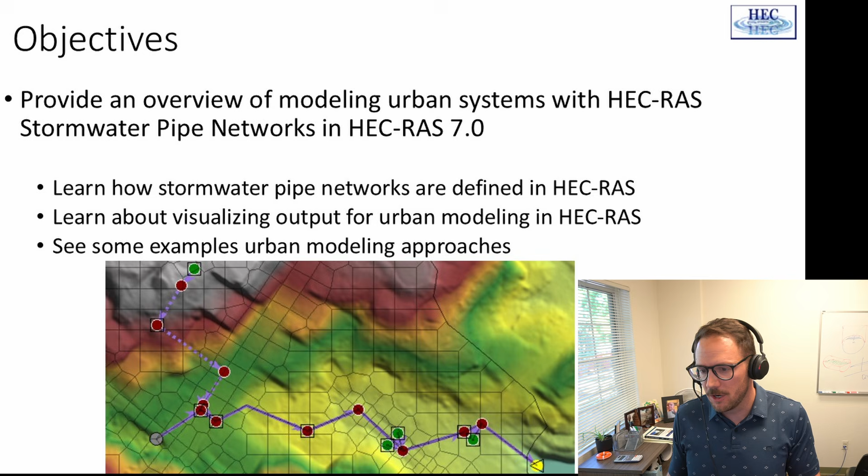Our objectives for today: I'm going to provide an overview of modeling urban systems with HEC-RAS using our new stormwater pipe networks in version 7.0. We'll learn how stormwater networks are defined in RAS, how to visualize output for urban modeling, and I'll walk you through some examples of common things you'll come across while doing urban modeling and stormwater, and some ways to handle those.

I'm going to walk you through the methodology. Then we'll talk about geometry data, so how nodes and conduits are attributed and how to build a pipe network. We'll briefly talk about boundary conditions, and I'll show you how to access results. Finally, we'll close with some fun examples of common applications for using stormwater pipes in RAS.

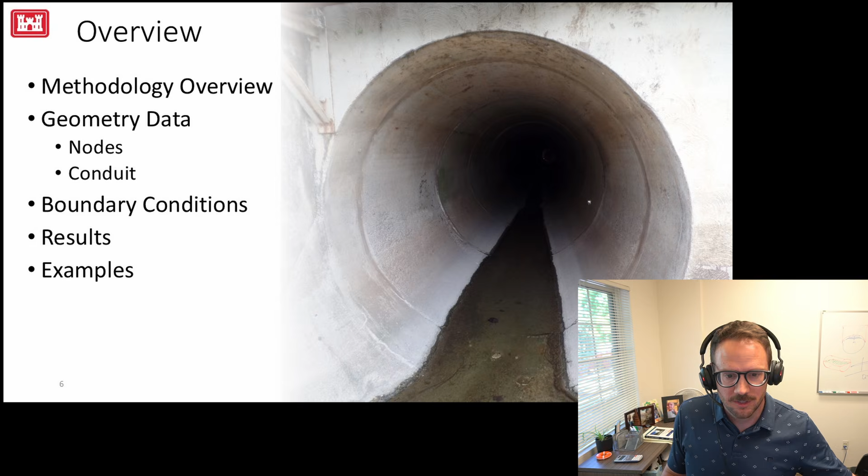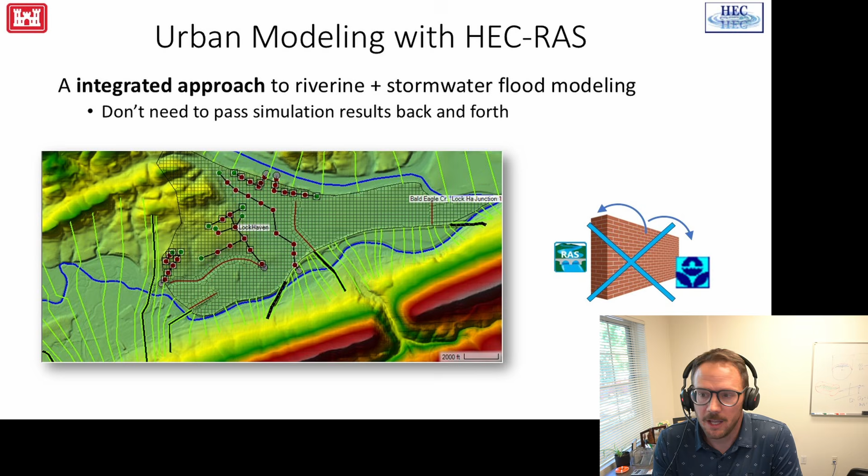So first things first, the big headline here is that now with stormwater pipe networks in RAS, we really offer an integrated approach to riverine and stormwater flood modeling. In the past, maybe some of you have done this: you wanted to use RAS for our robust 1D and 2D surface models, but you also needed to model stormwater pipe networks, and we didn't have that ability. So one method people used was to compute their stormwater networks in some other software, usually an EPA SWMM-based software, and then pass boundary conditions back and forth.

And this is awkward, and it doesn't often work great. So now you don't have to do that anymore. With HEC-RAS, it's an integrative approach to 1D, 2D surface models and stormwater pipe networks.

In addition, you guys are pretty creative. I've seen some really creative workarounds to model pipe networks in RAS and 2D surface models, such as culverts and ditches and burning channels in. So you don't have to do that anymore either. You can actually model those pipe networks directly.

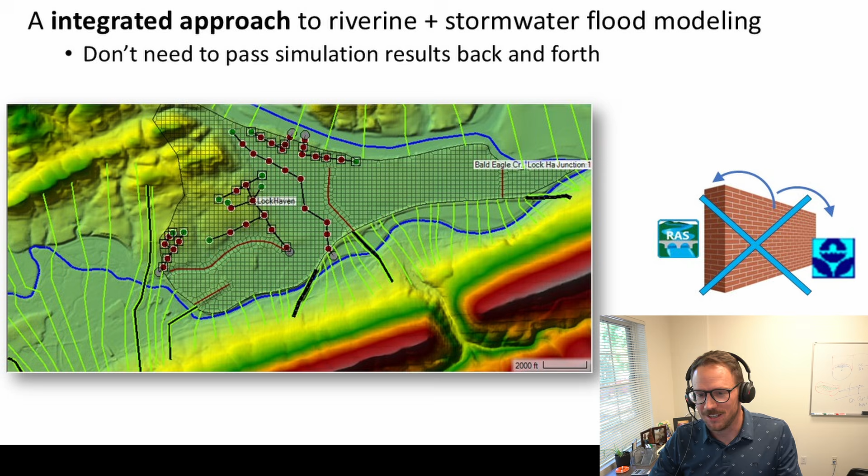So what are they? Pipe networks in RAS allow you to create nodes and conduits, create a network, and then integrate that with your existing surface model, whether that's 1D or 2D. We're really excited about this because it really expands the applicability of RAS for urban and interior drainage modeling.

This type of modeling is becoming more and more popular, and it's becoming more and more required for studies. The timing for pipe networks is great - you can build these pipe networks in your existing model, and that allows you to much better assess the pluvial flood risk, and then also analyze the adequacy of existing stormwater systems.

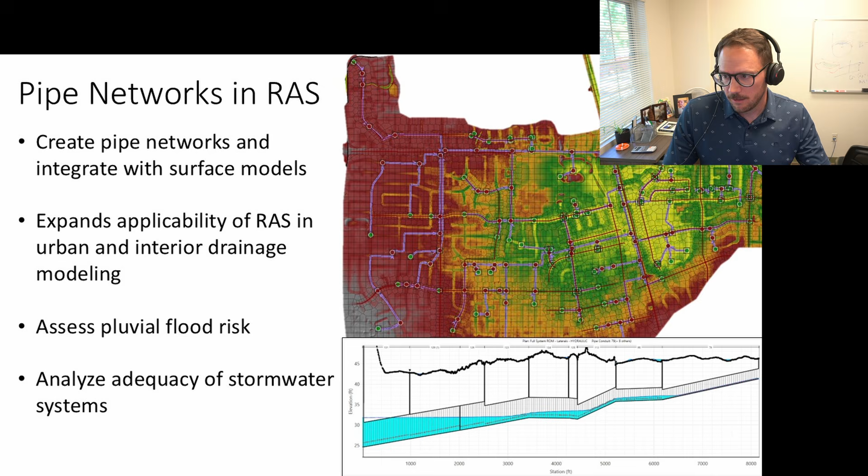Let's start with our methodology. We're going to go through briefly how RAS computes pipe networks. So first, like lots of different pipe network models, we're node and conduit based.

A user defines nodes and conduits in the geometry. I got a picture of that above - the purple conduits with the different colored nodes. I'll talk about why those are different colors later. But the user will go in and define attributes for nodes and conduits, such as the invert elevations, base areas, the roughness, that sort of things for your system.

Then what we do is, with that information, we'll actually create a computational mesh. This is just like what we do in 2D, where we're using subgrid bathymetry. We make cells and faces, and then we compute property tables for them. So this picture on the bottom, I've emphasized it - the mesh is bigger than the actual pipe here, so you can see it. But here's the pipe network mesh that we created from the attributes above.

So what we do with those property tables for the cells and faces is we take them into our 1D finite volume solver. The foundation of that solver is actually our 2D solver that you guys are familiar with. So many of the options you get with the 2D solver, you get with our 1D finite solver for pipe networks - mainly the ability to choose which equation set you want to use.

So we offer the full shallow water equations. You can also use the local inertial approximation, where we're just using the local acceleration, or you can take out both the acceleration terms and only use diffusion wave.

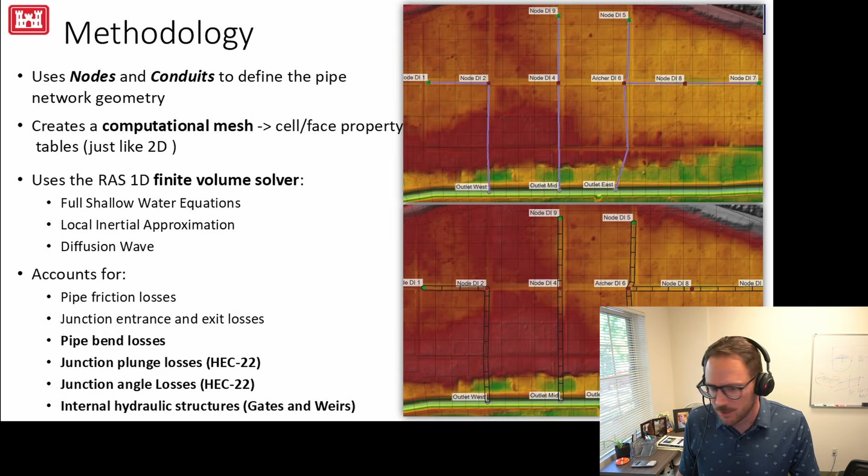So let's talk about some advantages to this approach, particularly compared to a 1D finite difference approach. With the 1D finite volume solver, we've got really good stability at low flows and steep slopes. Those are not a problem with pipe networks in RAS. And we have stability through flow transitions.

Pipe networks can handle open channel flow and then transition to pressure flow and back, and they also can transition between supercritical and subcritical flow. In the picture on the right, we're seeing just that - the little red line on the profile plot is the critical depth. You can see that some of this pipe network is below critical depth, so we're computing supercritical flow through there, and then we have a jump and pressurization that's happening within a conduit.

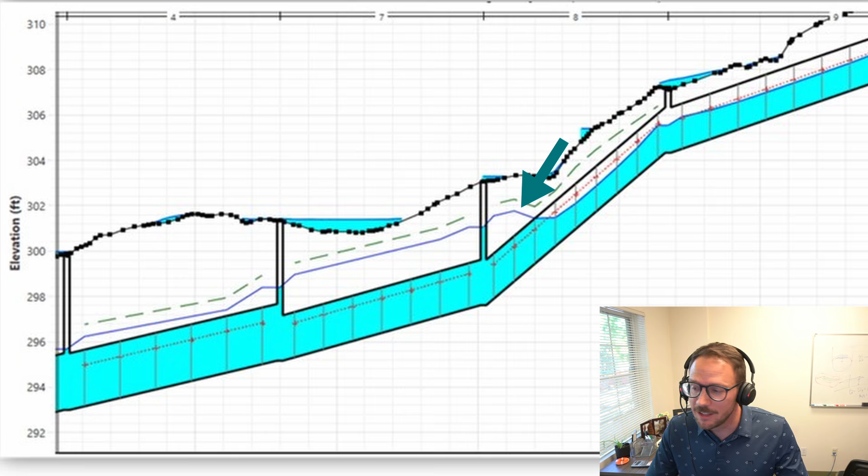So all of that is an advantage of the approach that we took. You can compute plunging flows as well, as I mentioned on the last slide.

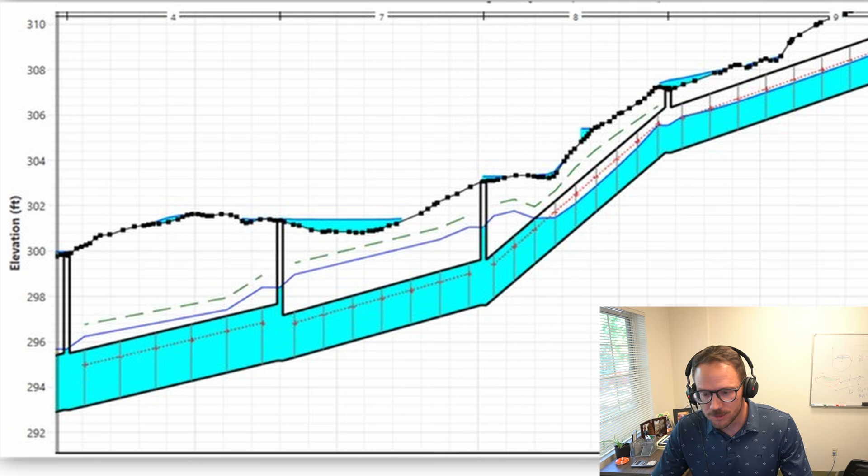That's very common in stormwater pipe networks, particularly when we have these big deep tunnel systems where surface pipes are plunging flow into the deep tunnel systems, and we handled that very well.

Really, the two unique things about our approach are the faces and the cells, how we can take a conduit and you get to decide how much resolution you want for a particular conduit. So you set the cell size. If you need more resolution in some areas of your model, you can do that. That gives the user a lot of tunability to determine where they need resolution and not.

Also, with this approach, we can know what's happening within a conduit. For a lot of finite difference models, they're actually just computing node to node. But since we have faces within a conduit, we can know that this conduit is half submerged, half pressurized, or maybe half supercritical flow. Those really affect conveyance. That's a really big advantage of our approach, that you have this in-conduit resolution to the hydraulics.

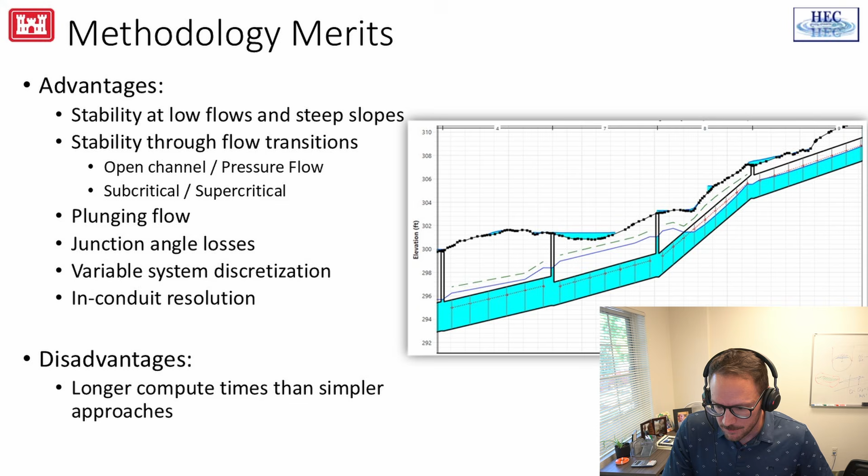The disadvantage, though, is that compared to very simple approaches for pipe modeling, these node-to-node computes, our computes are longer than them if we compare just pipe network to pipe network. However, once we start integrating surface models, they get much more comparable, as our surface models are quite robust.

Wanted to show you a fun trick that we're doing in order to compute pressure flow and surcharging in conduits. Because we're using subgrid bathymetry, we have these property tables, and we have to account for when the conduits get full. So what we're doing is we actually have these negative curves, a positive component and a negative component to each of our hydraulic property curves. We compute both of them, and the resulting curve is what you get in the solution.

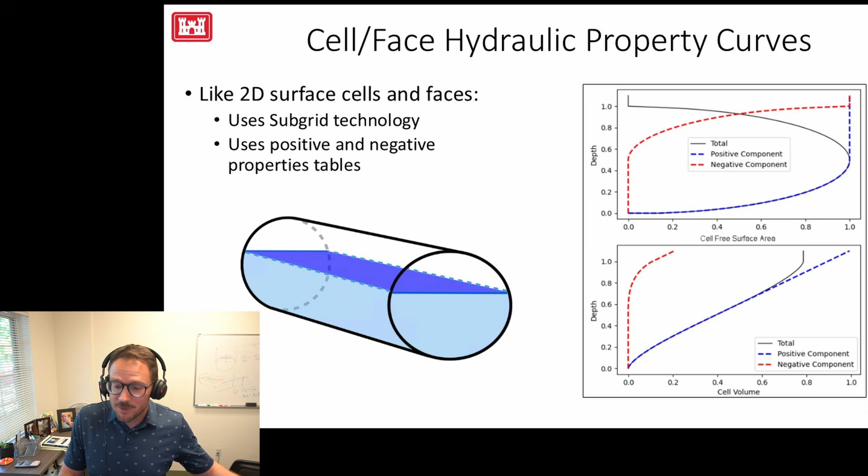So we have these positive and negative property tables, and we actually have a loop that computes both of them. It's kind of a cool trick that we're doing in order to use our 2D finite volume solver foundation. That was the overview of how we are computing pipes in RAS.

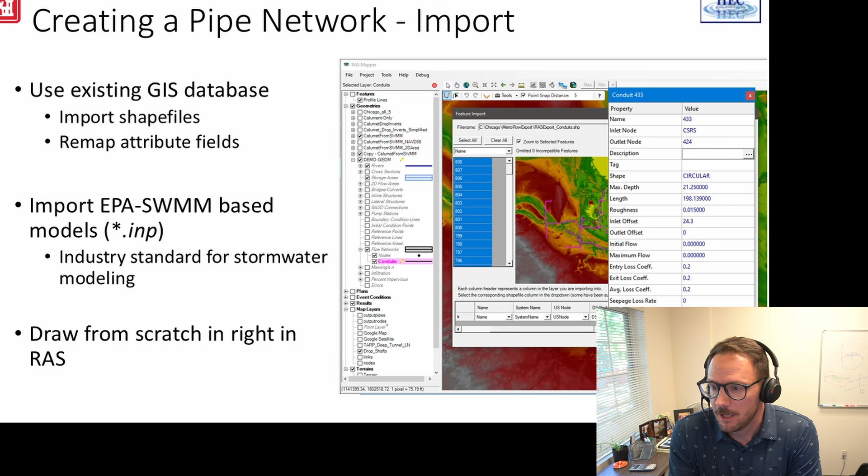Now I'm going to walk through what we're doing in order to help you build models quickly. A lot of pipe networks, cities, municipalities have their pipe network data in GIS databases, either shape files or some kind of GIS format that shows where their nodes and conduits are, and they have attributes. So what we do is we allow you to import directly from GIS.

What I'm showing you on the right there is our fancy importer. What you can do is remap the attributes from your shape files into the attributes that RAS needs—various invert elevations, conduit types, shapes and sizes. You can import those directly and really get to modeling quite quickly if you already have that data available.

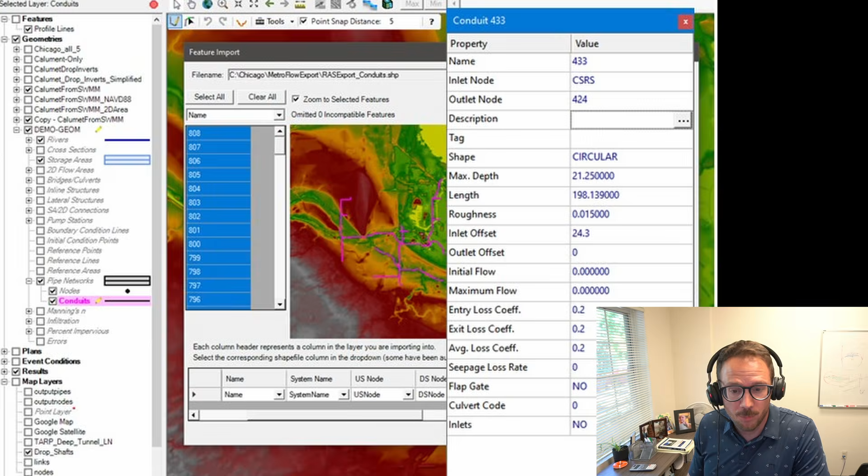Another method you can take is to import directly from EPA SWMM. If you have an EPA SWMM based model, an INP file, which is the input file for SWMM, you can point to that input file and we will bring in the geometry from the SWMM model. We wanted to do that because SWMM is the industry standard for stormwater modeling, and we know there are a lot of SWMM models out there.

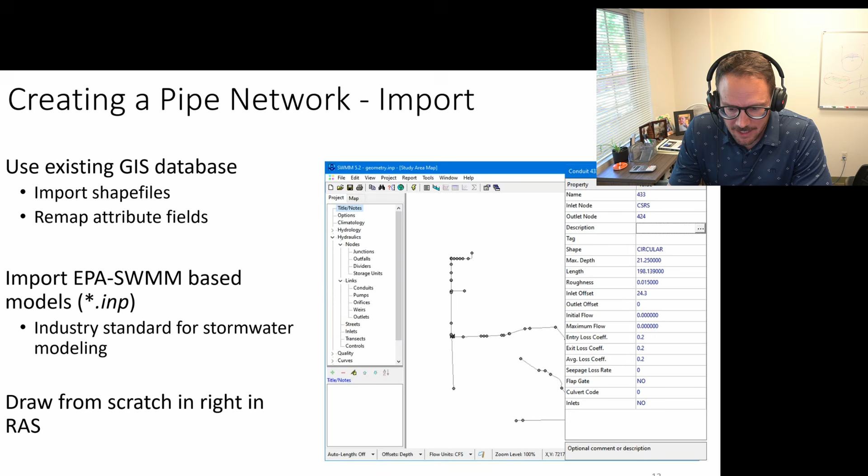If you have a geo-referenced SWMM model, you can really get a RAS model running quick by importing that in. What we do is look at your geometry and also look at the attributes of all the nodes and conduits, and we map those automatically to the RAS attributes that are needed. Really, really handy tool—if you already have a SWMM model available, you could get a RAS model up and running quite quickly.

But you also have the ability to draw from scratch right in RAS Mapper, so I'll show you what that looks like. First, you'll start with adding nodes, which are just points in RAS Mapper, so you can place points using the tools that you're familiar with. Where do you place them? You'll need them wherever you have two or more conduits that meet—that's what we call a junction—or if you want to make some connection to surface elements.

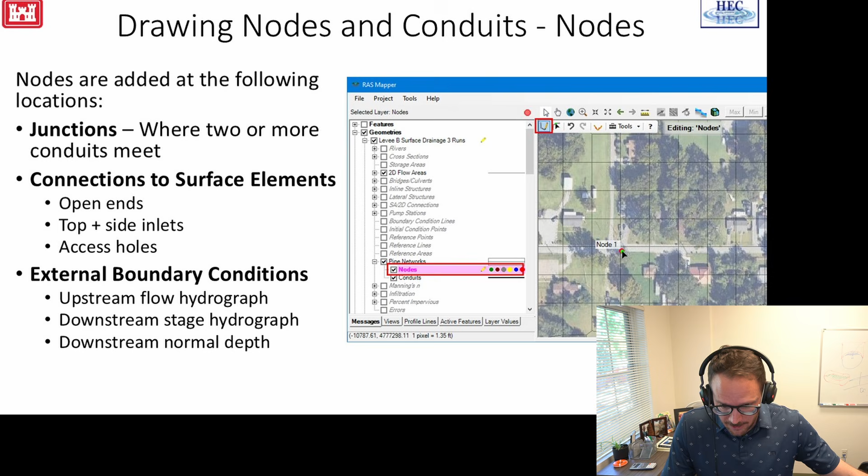So if you have a culvert opening, or if you need to add top or side inlets to represent curb inlets or manholes or access holes, these are locations that you'll need nodes. In addition, if you have some external boundary condition, like an upstream flow hydrograph, a downstream stage hydrograph, or maybe a normal depth, you'll need a node there to attach a boundary condition to.

Things to know here are you want to draw your conduits in the positive flow direction. This is good. It's not required, but it's good because it's going to help you better understand your network as you're drawing that. And also, we're using that conduit direction to account for these automatic minor losses. It's best to keep them in the positive flow direction so that we can compute the minor losses appropriately between conduits.

Another thing to know is that the length of the line that you draw is the computational length of the conduit, and so there's not a length attribute that you set like other models. Because we're georeferenced, the line length in GIS is the computational length as well. So that's good to know there too.

Some handy tools: you can split a conduit if you need to add nodes in between. Say if you wanted to add a drop inlet between two conduits, you'd split it, and we'd add a node there automatically for you.

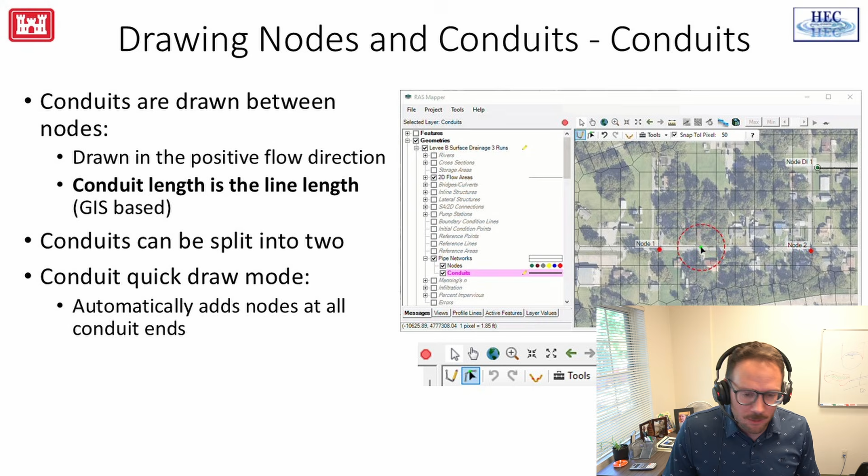You can also use our quick draw mode. What that does is automatically place nodes as you are drawing your conduits. So as you complete a conduit, we will place nodes, and that really helps you get a pipe network up and running quick.

Wanted to briefly talk about node attributes. A few node attributes I wanted to show you. So first, invert elevation—pretty self-explanatory there. That is the bottom of the node. I've shown you there on the bottom.

But something that's unique to RAS is that we use a base area attribute as well. So you might ask, well, what is a base area? Well, that is actually the size of the junction node itself, so we're looking at the area of the node. And then with that area, we can compute the volume property tables, the elevation-volume property tables. So if you know that your junctions in your system are of a certain size, you can add that into your RAS model, and we will account for that storage within your system. That's pretty unique to our approach—not a lot of models will let you do that. So if you have those base areas, make sure you set them in there.

So the other important attributes here are top inlets and side inlets. You can attach a top or side inlet to a node, and that allows you to connect to some surface element, either a 2D area or 1D elements. This is where flow is allowed to enter into your pipe network or come out of your pipe network.

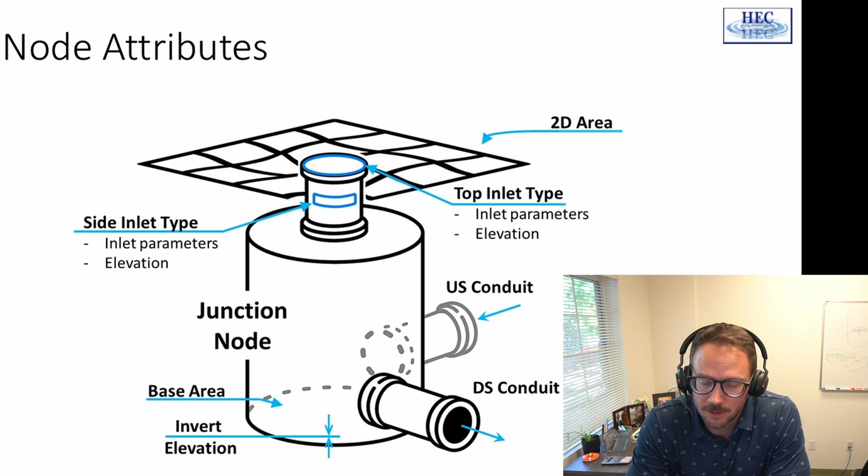So let's go look at what the inlet attributes look like. Here's a little diagram of what we're talking about when we're talking about top inlets and side inlets. The top inlet is oriented horizontally on top of your node, and you would use this to model things like manholes with or without covers. We have an option that allows you to only surcharge flow—so if a manhole cover is on, we don't let flow in, but we will let flow out. You'd use these to model grated street inlets, or if you have riser structures with an overflow inlet on top, that's where you'd use a top inlet as well.

So side inlets are oriented vertically. You'd use these for curb cuts and curb inlets, and also if you have a riser structure with some side orifices on them, like restrictors or bleeders—this is where you'd use a side inlet. I've got some examples of that later in the presentation.

So attributes are mostly what you would expect. We need some dimensions from you, and for the side inlet, we need the shape as well. What we'll ask is that you provide us weir and orifice coefficients, and you need both of them.

We will compute either weir flow or orifice flow, whichever is hydraulically appropriate for the given time step. You'll give us both, and then we'll decide whether it's weir or orifice flow at the inlets. And finally, as I mentioned with the manholes already, we have an option to only surcharge out of the inlet, meaning flow cannot enter the inlet from the surface, but it can only come out.

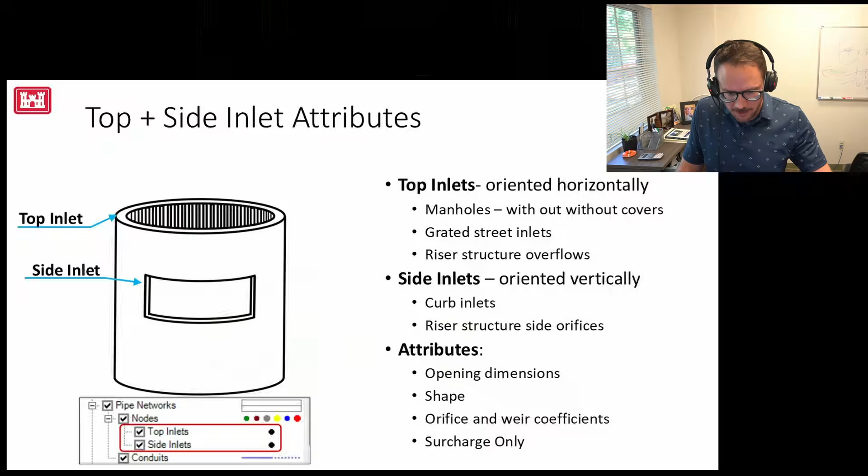So that's for modeling an access hole. Where are the top and side inlets? If you look at the tree, they're under pipe networks nodes, and you'll see the top and side inlets down there. The reason we did this is because you can define your top inlet or side inlet once, and then attach it to however many nodes you want. So instead of defining them in the node, like we were doing previously, now you define them in the top and side inlets tables, and reuse them everywhere else, which is really nice.

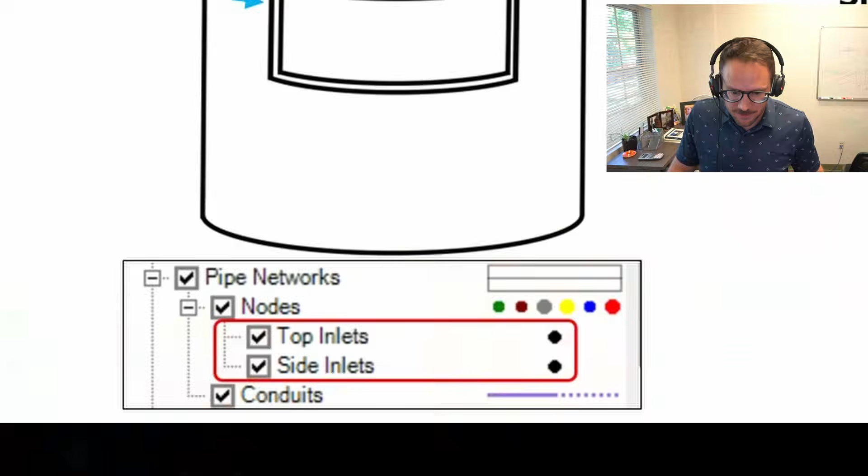I wanted to briefly talk about node types. Node types are an attribute of nodes in RAS, computed automatically. These colors in the tree on the right show you what type of node each of these nodes are in your pipe network. What we do is look at the node invert, the corresponding terrain elevation, and the conduits that are connected and their sizes.

Based on that, we determine how this node will interact with the surface. For instance, we can determine whether the node is a culvert opening—if it's exposed and essentially an open pipe, that node will get a culvert opening type. Otherwise, it could be a start or a junction node, or maybe even an external node.

Another nice thing is you can open up Mapper and quickly get a visual to determine whether or not you have the right data set up, because you can see what type your nodes are. It's a very quick, easy inspection to perform.

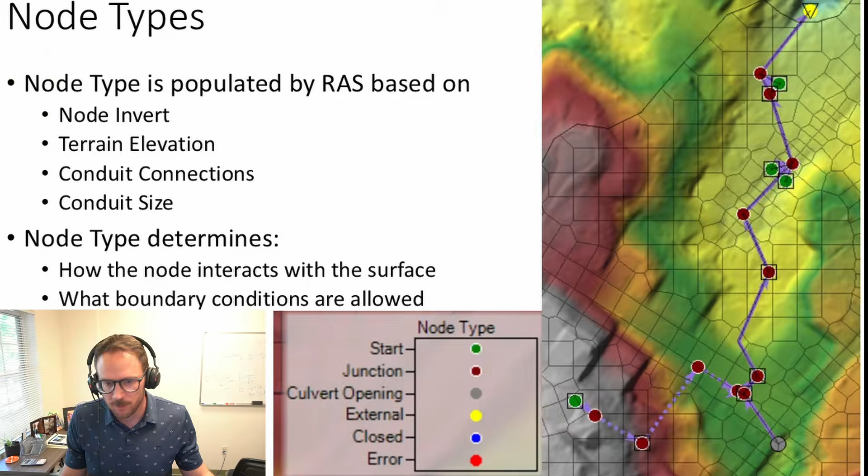For conduit attributes, mostly what you'd expect: you need to give us a shape, a rise and span. By the way, we've got lots of shapes to choose from—something like 8 or 9 different shapes, all the same shapes we have in our culverts, which you can use for pipe networks as well. You'll also need a roughness, a Manning's N, and entrance and exit loss coefficients, which apply where flow enters or exits a pipe.

Something that may be foreign or unique to our approach is that we use offsets for our conduits. What we do is look at the invert of the node, and then to get the conduit elevation, you set an offset. So if you have a conduit that is plunging into a node, you'll want to have an offset to raise the elevation above the node. Otherwise, they're most often just set to 0. The conduits get the node elevations that they're connected to, so that's nice—you don't have to enter those elevations explicitly; we'll grab them from the nodes. And if you need to modify them, you can with offsets.

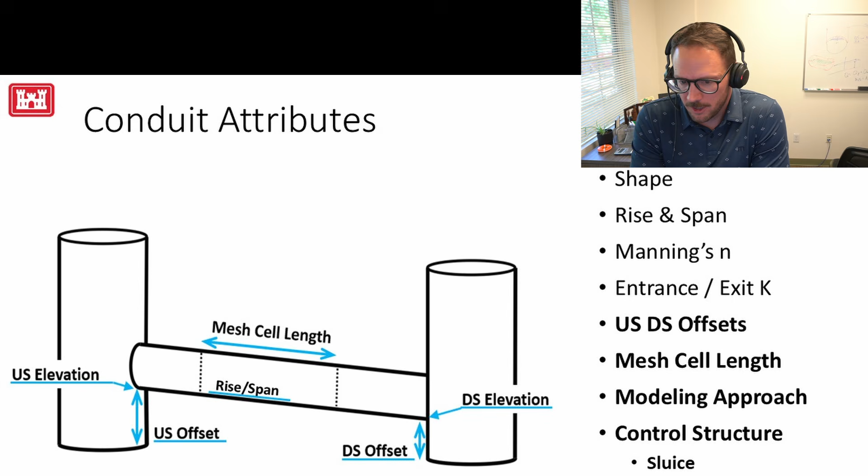Mesh cell length lets you decide how detailed your computation is, how many cells you get in a conduit. And for modeling approach, which I'll talk about more later, we have 2 different approaches for conduits: you can decide whether they're completely hydraulically modeled, or you can actually remove them from the mesh.

That'll save computation time, and I'll give you an example of that later. Another attribute are control structures. This is where you can, on a conduit, decide, do I have a sluice gate, do I have a flap gate, or do I have a weir?

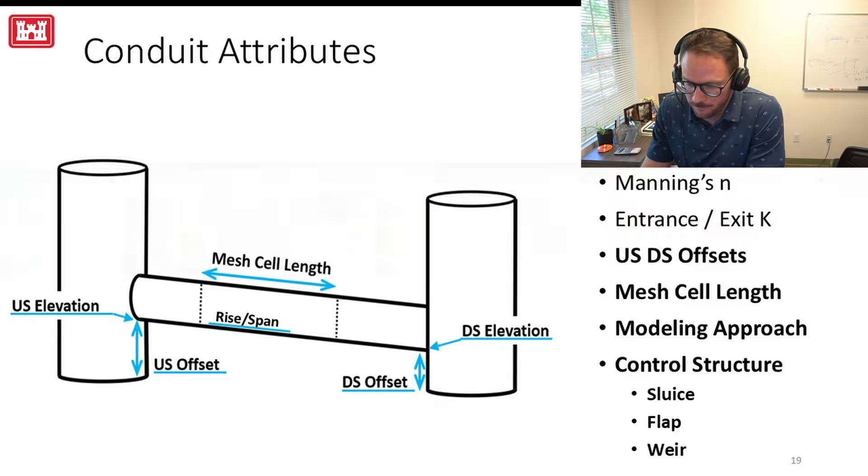All the data that you're entering to attribute your system happens in the tables within RAS Mapper. So you have nodes, conduits, and inlets tables, and this is where you're entering data.

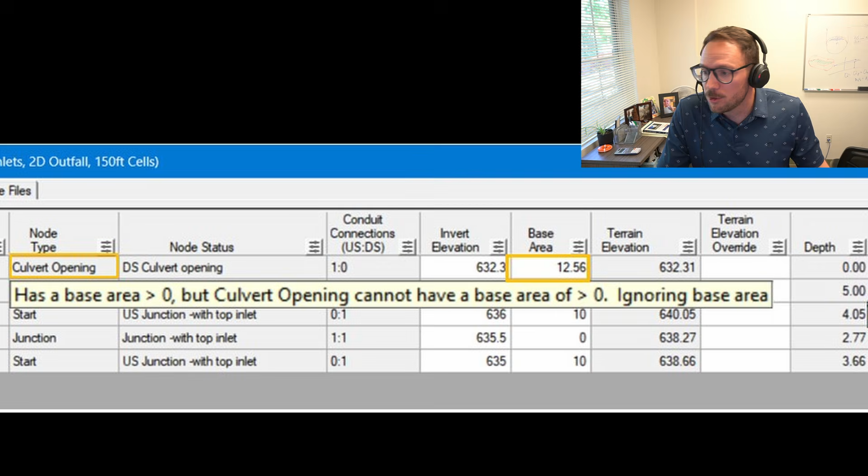Based on what you enter, we will calculate the gray fields. It might be hard to tell in the picture here, but there are gray fields in here too, and those are RAS populated fields. A lot of these are informational fields that help you attribute your pipe network.

We have a status that'll tell you what kind of node it is and whether it has any problems, or whether it has a top inlet or not, that sort of thing.

As you're going through and populating data, we will show you where there are problems. We have red outlines for missing data or an input problem that will prevent a run, and orange outlines to tell you here's a warning about what you have set up. If you hover them both, you'll get nice little tooltips that'll tell you exactly what the error is.

This one is telling you about your base area. You have a culvert opening, but you can't have a base area on a culvert opening, so we're just going to ignore it for you. On the other one, we're just missing data, so if you hover that, you'll see that we're missing data there.

We'll also show you these in the error layer, so you can show them all in one place, and that helps you as you're going through attributing this data. Looks like a lot, but we have lots of tools that are able to help you along the way, get your data in the right spot.

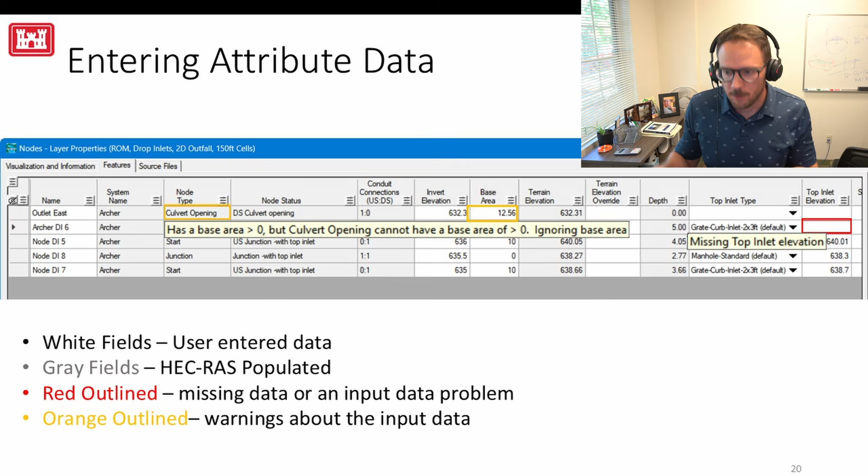Things that we have added more recently are hydraulic structures. You can have hydraulic control structures inside of your conduits. Our first kind of set of structures are gates, and you can choose between a sluice or a flap gate.

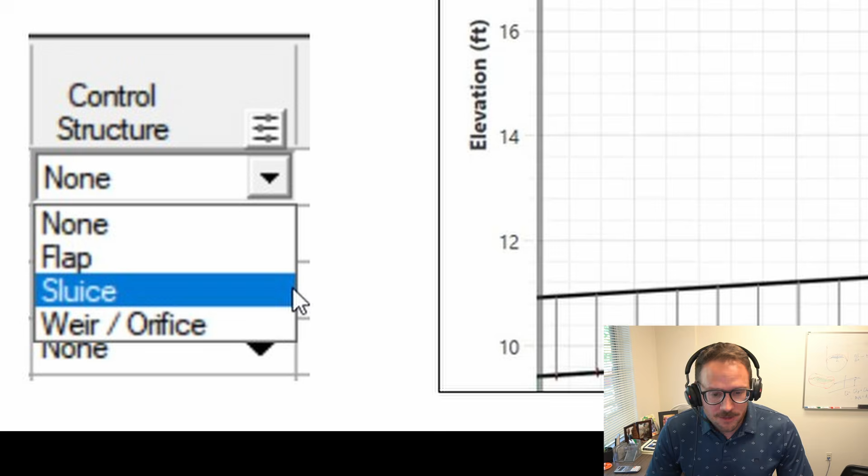I've got the picture on the bottom left here showing this control structure from the attribute table. When you select a conduit, you can tell it that you want to put a sluice gate on this thing or a flap gate. The flap or sluice gate will be assigned at the downstream end of the conduit.

It can be completely inside the pipe network, or it can be the interface between the pipe network and a surface connection. For sluice gates, you can operate them just as you would any other gate in RAS—using rules, time series elevations, or elevation controls.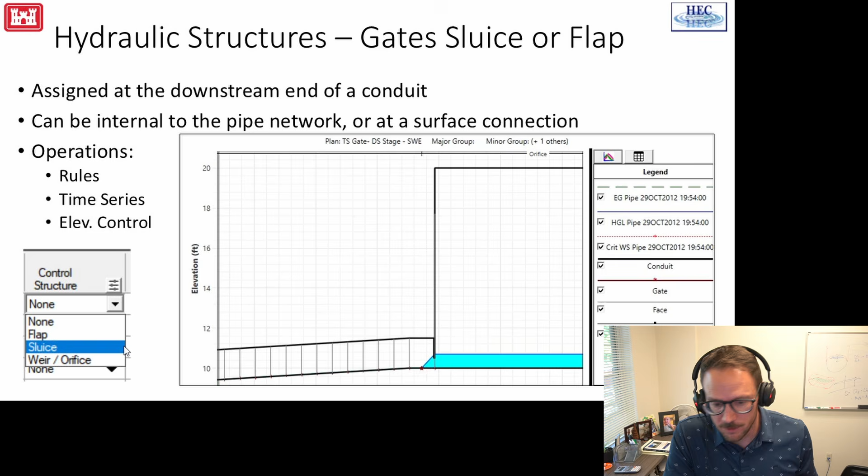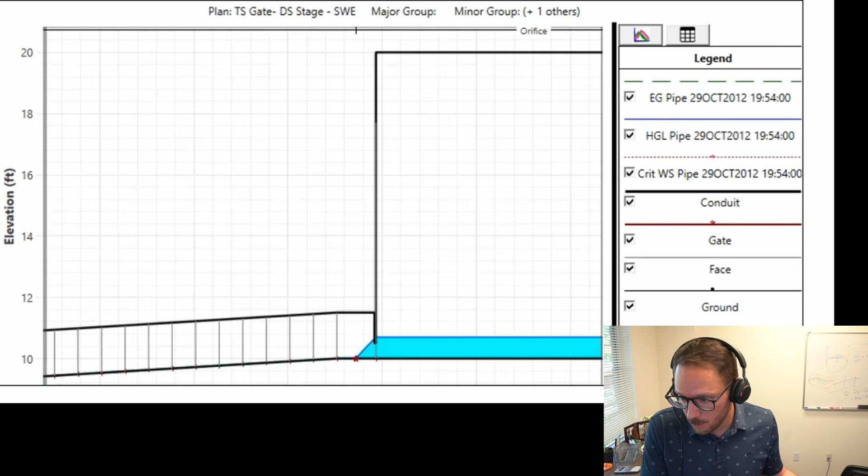I wanted to show you this example. Before I play it, I'll give you a little rundown. On the upstream end is a large subsurface storage tank. It's in a highly urban area, and stormwater is detained in this tank, then we slowly let it out through a gated orifice.

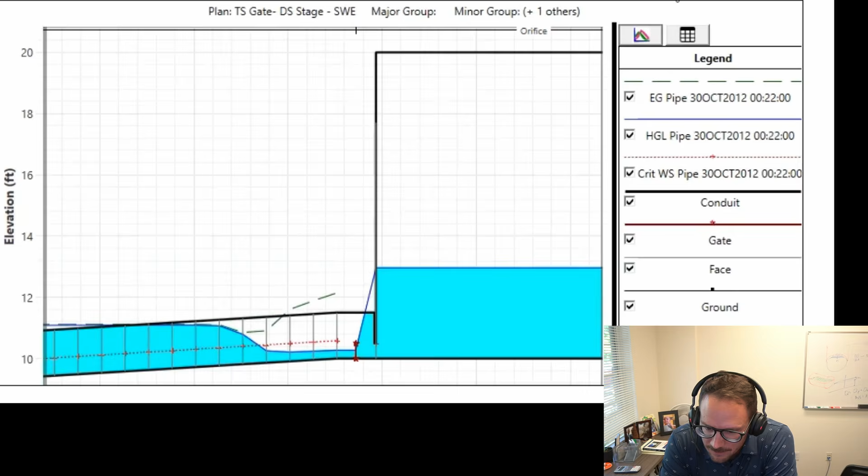As I hit go here, you'll see the water surface elevations rise, and then the gate opens and allows flow downstream. The river comes up on the downstream end, so you'll see the conduits kind of pressurized all the way back up close to the gate. You can see the gate opening there, allowing water out, then the conduit is wetted, and finally the downstream river comes up and you get that pressurization.

You can also add weirs, a little bit different from gates. You actually designate a conduit as a weir, so a weir's not assigned on the downstream end—you just say this conduit should behave as a weir. It's also under this control structure attribute.

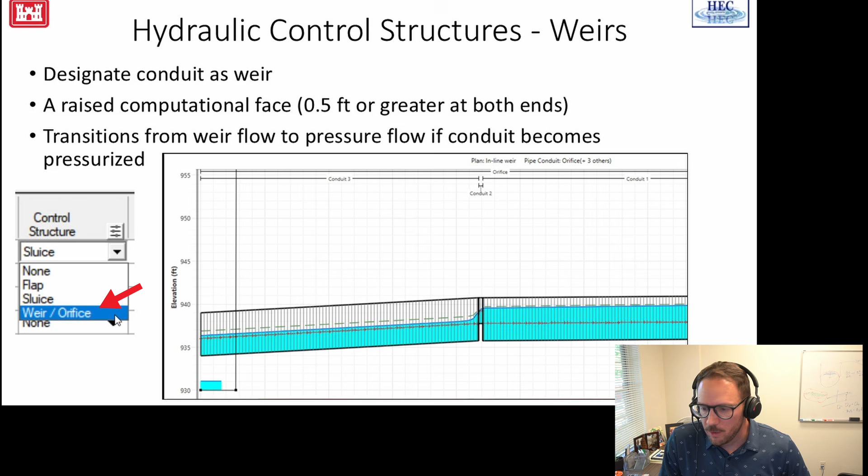Really what it is is a raised computational face. It's essentially a short conduit, and we're raising this computational face, and we'll compute weir flow over that face.

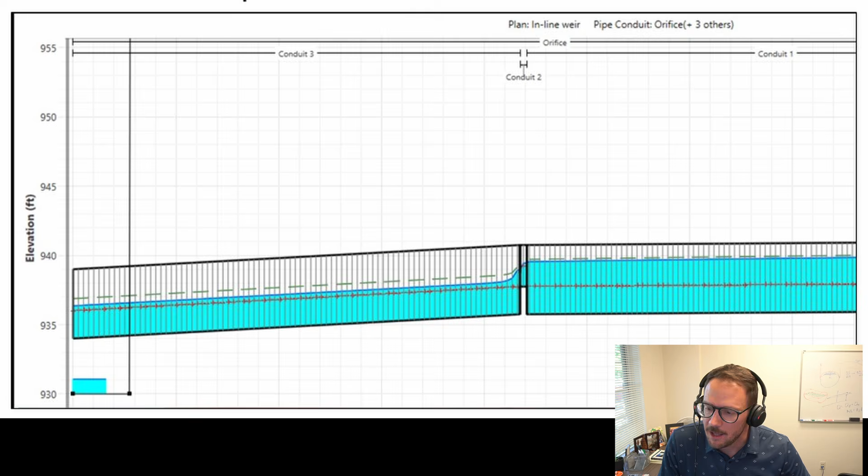What's nice about these is whenever appropriate, we'll compute weir flow or pressure orifice flow as needed. So whatever the hydraulic conditions are, we'll transition between weir flow and orifice flow as the system pressurizes. Just a simple example on the bottom there, you can see I've got my weir defined right in the middle, and we have critical flow happening over the weir, backing up water in the upstream end of our conduit. So maybe you'd have a diversion at this weir to take flows either to your treatment plant, or maybe to an outfall.

Just briefly, you don't actually have to define any boundary conditions for your system. If you have different inlets defined on your nodes and you're connected to the surface, you can run rain on grid, and your boundary conditions will just be the connections to the surface. So these are curb inlets, grated inlets, access holes, that sort of thing. The boundary conditions for your pipe network can just be the surface connections.

Also, you can have culvert openings, which are kind of like the outfalls to your system, or maybe there's an inflow as well, like a ditch on the upstream end flowing into a culvert into your system. And we can have connections to pumps within the conduit system. So if you have a wet well that you need to pump out of—I'll show you an example of that later—that is an appropriate boundary condition as well.

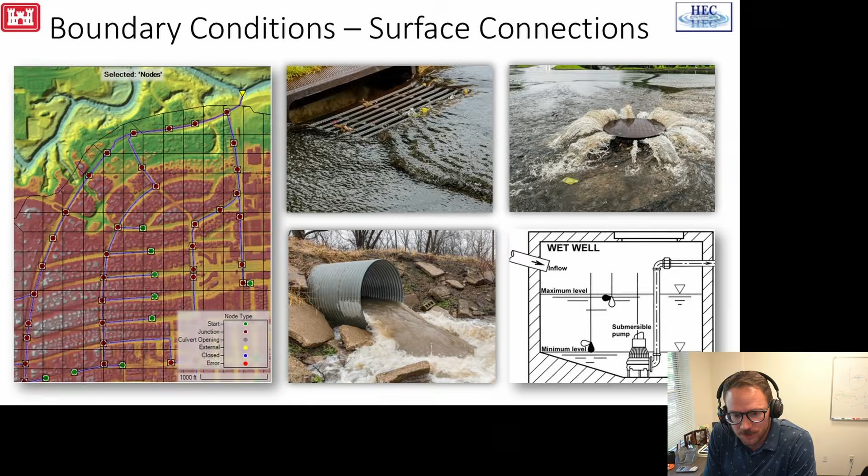But if you want to use external boundaries, you can. They are applied at nodes, and we have just the basic types: flow hydrographs, stage hydrographs, or normal depth. What this allows you to do is bring in data from external sources. So if you wanted to model your hydrology in HMS and bring that data in to drive your pipe network, this is where you would do that.

You'd add these boundary condition locations, and then point to your HMS results to drive your pipe network. Also, if you have an EPA SWMM model and wanted to use that to compare to your RAS model, you could bring in those results as well. We have a handy tool for that I'll show you.

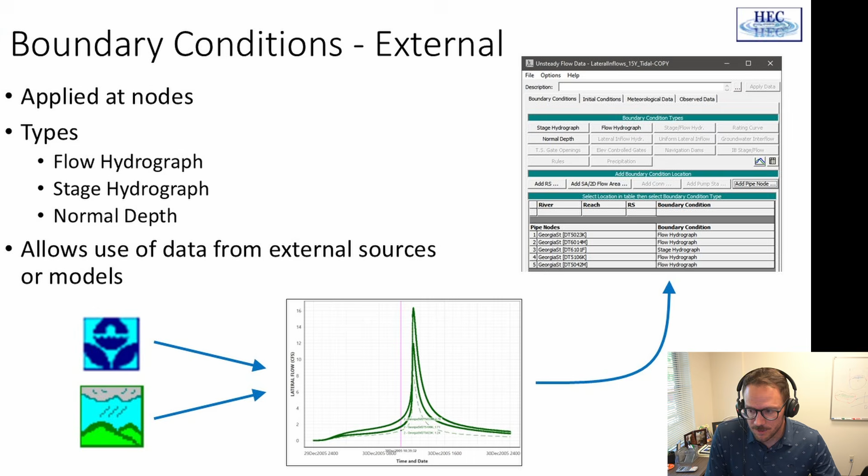As we were in development and doing validation, we did a lot of comparisons to EPA SWMM models, because those are sort of the industry standard. A tool we developed was to be able to import EPA SWMM results. You have a SWMM model and it has output, a .out file. You point to that, and what we'll do is go in, read all of the results out of there, and then output it to DSS.

And then if you already have a geometry in RAS, we'll automatically assign all of the observed boundary locations to the nodes in your model. This is really nice—you can very quickly get your SWMM results into RAS, and compare them right in RAS in our hydrograph viewers. It's a really handy tool for us during development, but we found users really enjoy comparing those results as well.

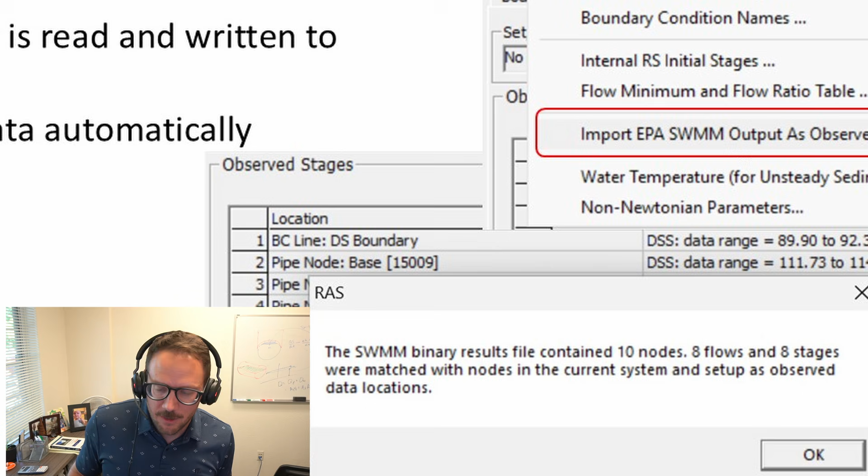The message box on the bottom says: we read the binary file from SWMM, and it looks like you have 10 nodes in there, and 8 flows and 8 stages were matched in our system. So we match those to our locations, and you get to see them right in RAS results.

So speaking of results, you access them mostly through RAS Mapper. Like you have for 2D areas—water surface elevation, depth, velocity, that sort of thing—you get those for pipe networks as well, plus a couple extras such as surcharge, percent full, that sort of thing. I'm just going to show you a little animation here. You can very quickly select conduits in RAS Mapper and then plot profiles from them. You can see we're running this model with a rain on grid.

Inlets are providing the boundary conditions into the pipe network. The profile on the right is showing you stages there, so the hydraulic grade line, but also along the conduit we're showing you velocity and flow, which is really handy as you're going through debugging or even analyzing your system to determine where flow is going.

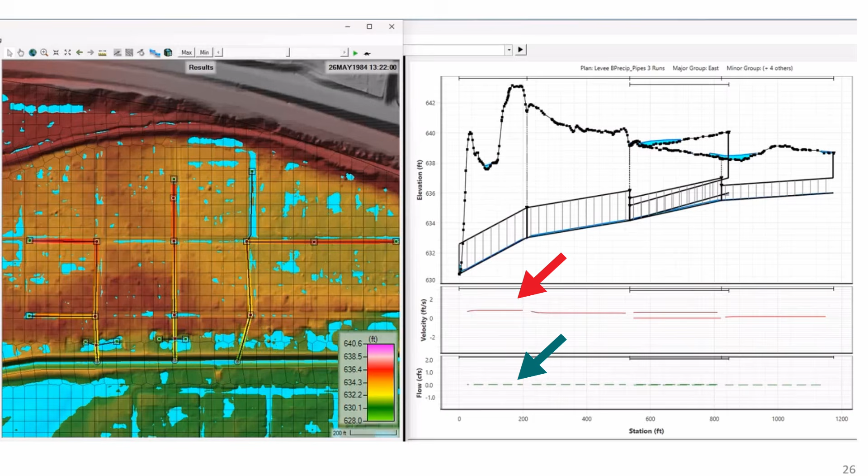Seeing that velocity and the flow right on the profile plot is very, very handy.

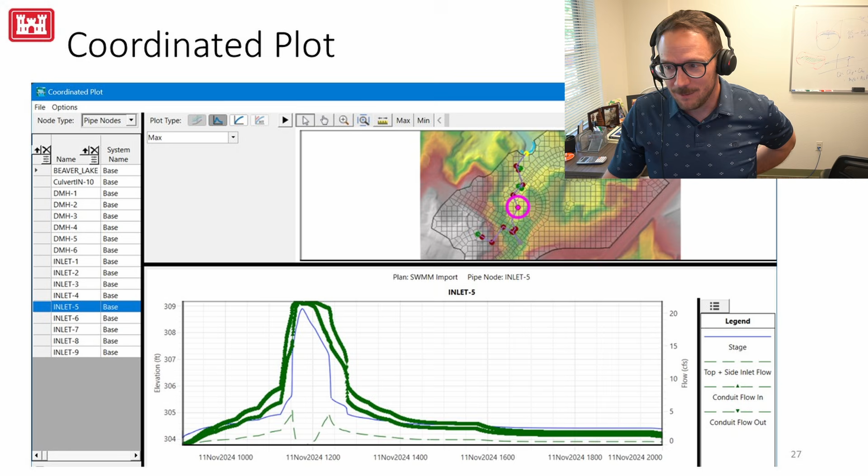I don't want to ruin this for the next presentations, but this new coordinated plot, which we'll talk about later in our webinar series, is super handy for plotting pipe networks. You can very easily go in and select nodes spatially, and right away you'll get the hydrographs or profile plots for those nodes or conduits.

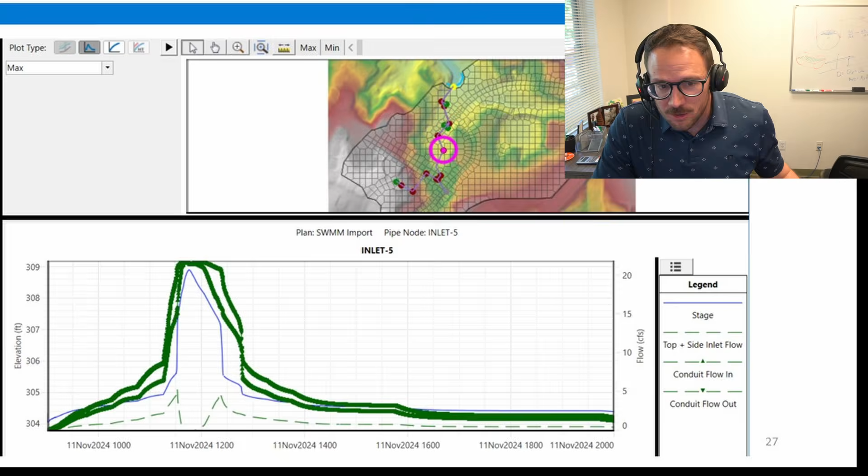Once you select spatially, we will also show you which node you're selecting in the table on the left. So you can either select from the table or select spatially. You can have multiple nodes or multiple conduits shown at once.

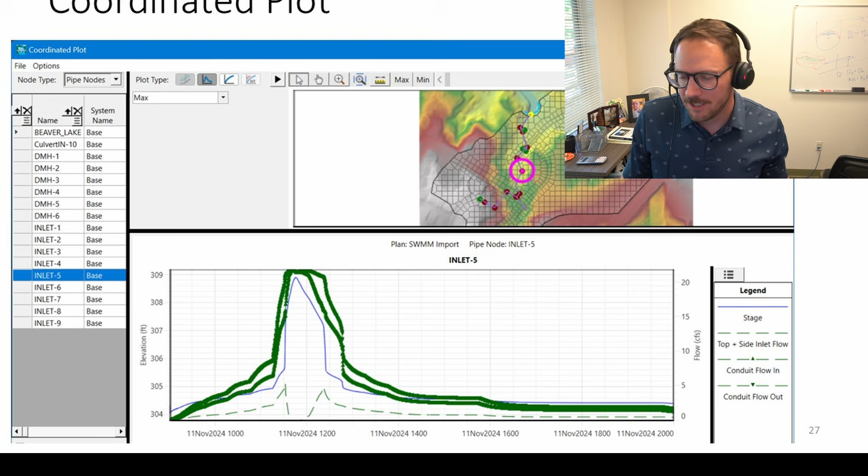This thing turns out to be very, very handy for pipe networks because you can get turned around a lot. There are a lot of nodes and conduits, and being able to select right from the map and from the table at the same time is very, very, very handy.

A big thing, particularly with urban modeling and analyzing pluvial risk, is that you need to be able to very easily visualize and communicate the outcomes of different study alternatives. With coordinated plot, RAS Mapper, and our profile plots, you can very quickly and easily compare different study alternatives. I have an example here of a rain-on-mesh model.

This is our Davis example, and one is without a pipe network improvement. That is on the left. You can see depths are higher there.

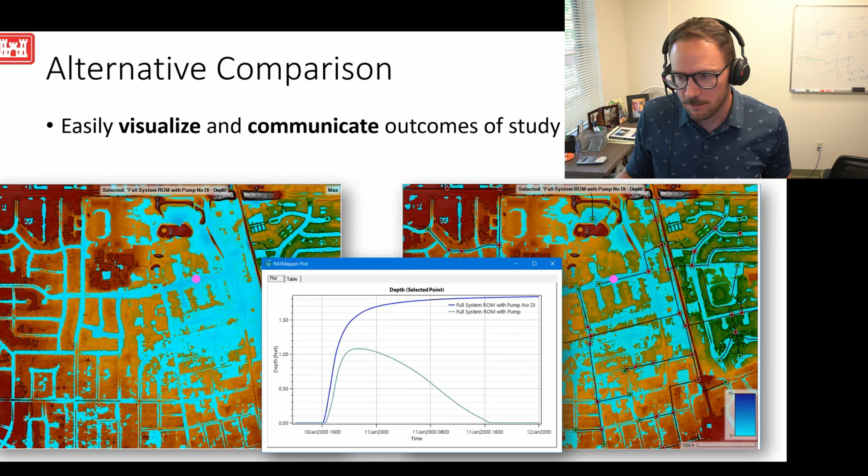On the right, you can compare very quickly with this pipe network improvement. We've reduced flooding substantially, and anywhere spatially within the model you can ask, how well did we do here? How much did we reduce our flooding? You can find that - it's very easy to compare alternatives.

Now we are on to our example portion of the presentation. I'm going to walk through a couple examples and show you different things you might come across while modeling pipe networks and how you might handle those.

Our first and most favorite example model is Davis, California, for obvious reasons. I'm going to look at just two places in this model. On the very downstream end first - that's the red arrow I'm showing you, the downstream end of the model. Then after that, we'll look at the circled area to demonstrate the trunks and laterals.

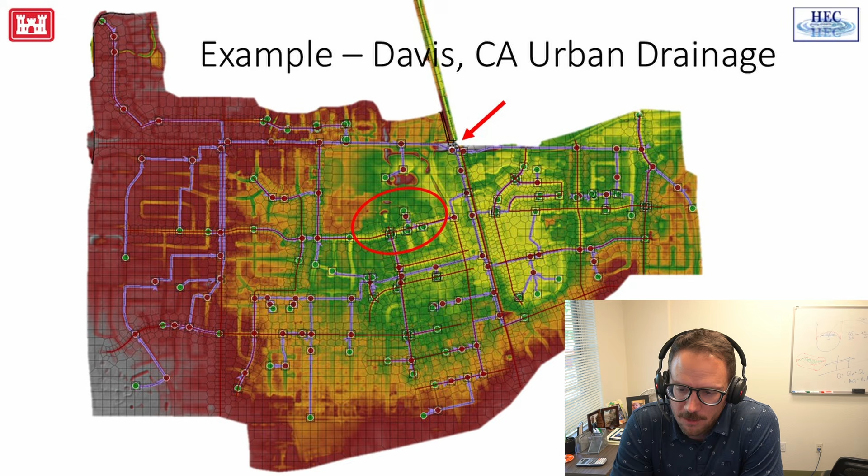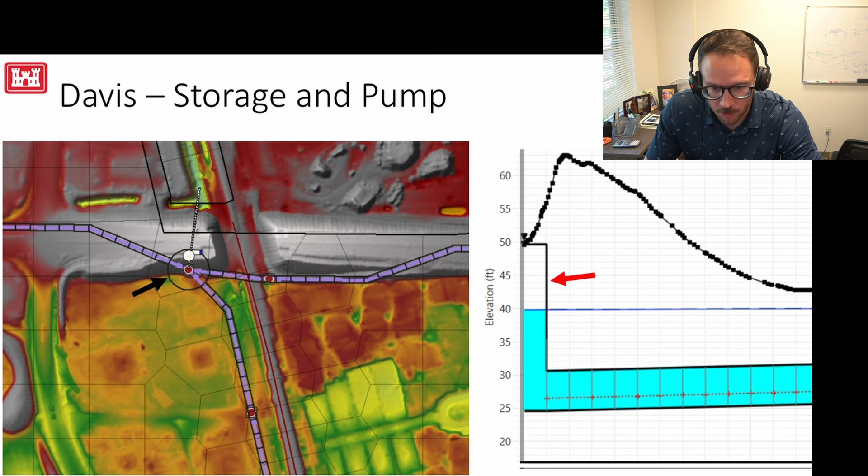So it's subsurface storage. The stormwater system drains to this large storage node, and you'll notice we have a pump connected to this node. We're pumping out of the node and into the channel to the north, and that's how this particular system works. The example here is you can very easily add a storage node - add a large base area to the node - and then connect a pump to that storage, and either pump it over a levee or pump it to an outfall channel close by.

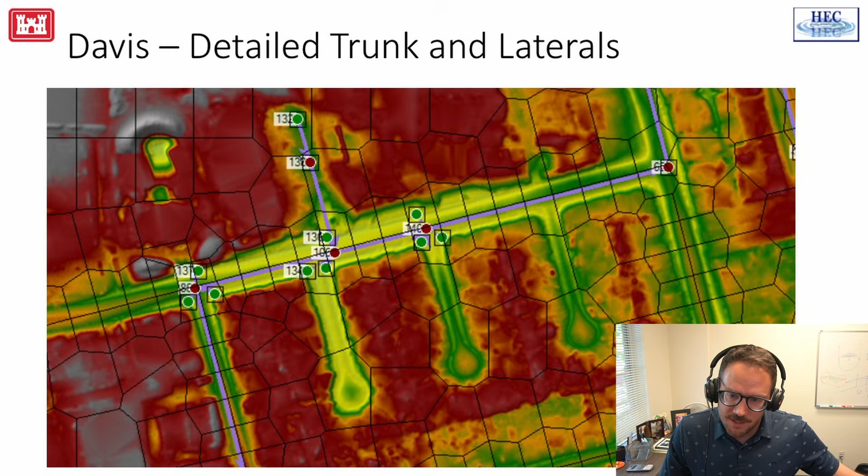Another example here is a detailed urban modeling situation with trunks and laterals. This is Davis, just a mixed urban area. On the south side of the street we have homes - you can see the cul-de-sacs there. On the north side there's a school and a library. You can see a trunk line running right down the center of the street, and all these nodes clustered in a few locations along the trunk - those are laterals.

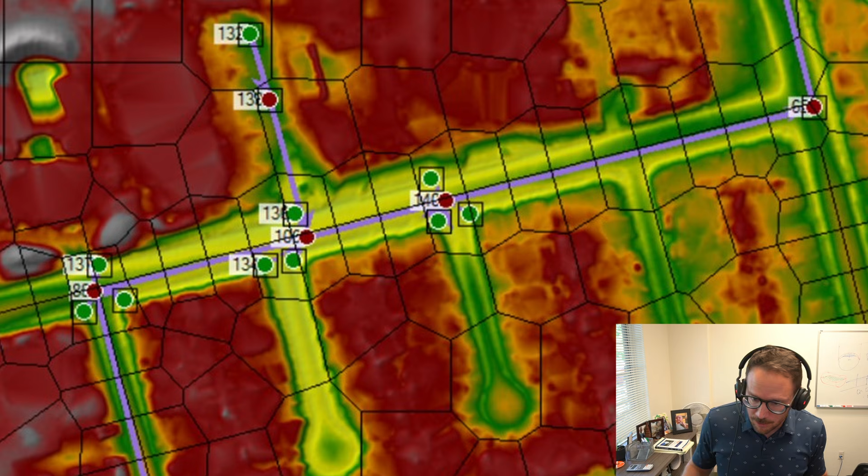Often the crown of the road is a pretty significant hydraulic control. In this case it's nearly a foot higher than either side of the road, either gutter. So when doing these urban models, particularly for small cities or residential areas, if you have very large crowns or significant cross slopes, you want to make sure you align faces on top of those so you're representing the hydraulic control there. In some cases, flow on either side goes different directions.

And so it's important to keep that flow on the particular side of the street that it was designed for, and that the inlets on that side of the street were designed for as well.

Back to trunks and laterals. So this is an example of our instantaneous conduits. We zoomed in and we're looking at the conduits now, and you'll notice that for the little short laterals, they have these dashed lines on them. And that's because of our modeling approach.

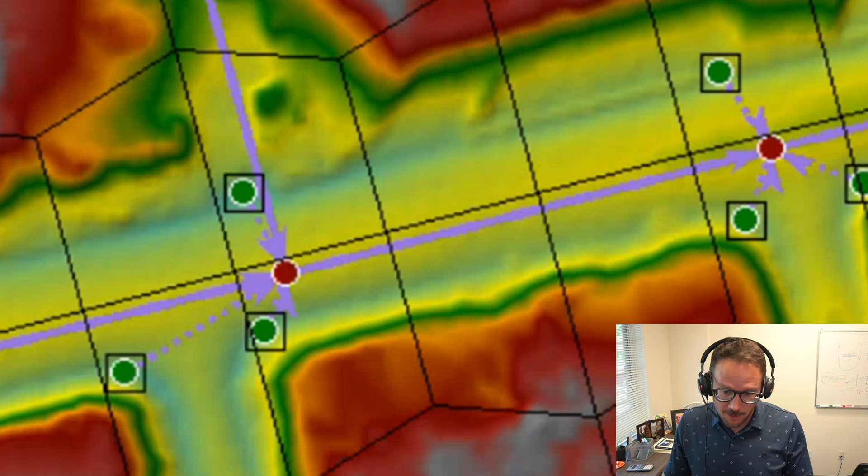We've set those as instantaneous. What that means is they are not a part of the hydraulic computations, but we're simply transferring flow from the inlet of the node to the receiving trunk node. You see each of these green start nodes, they have inlets on them, which you know because of the boxes around them. So as water exceeds the inlet elevations, either from the pipe network or from the surface, flow goes to or from that trunk node. But it's not a part of the mesh, or not a part of the hydraulic computations. The reason we did that is so that you don't have to have these small, sometimes steep conduits inside of your mesh and make really small faces and drive runtime.

So instead, you set them as instantaneous. And now you can still model these laterals without including them in your mesh. So I'm demonstrating that here. You can see the mesh for the trunk line, but the laterals are actually not included in the mesh.

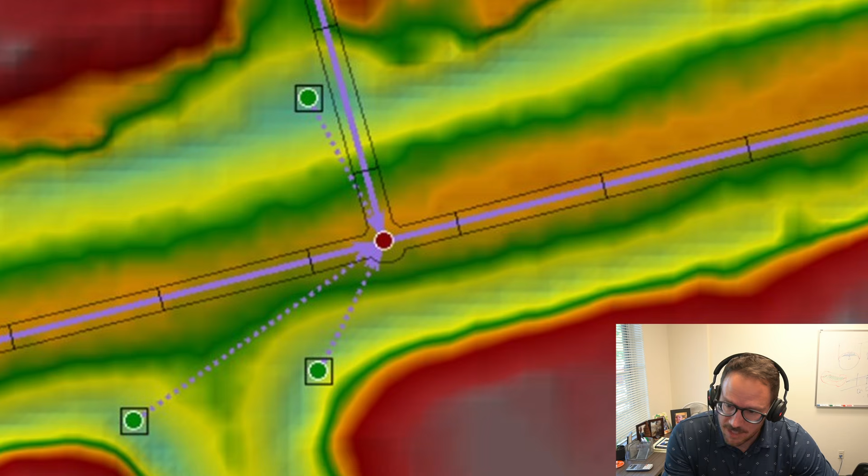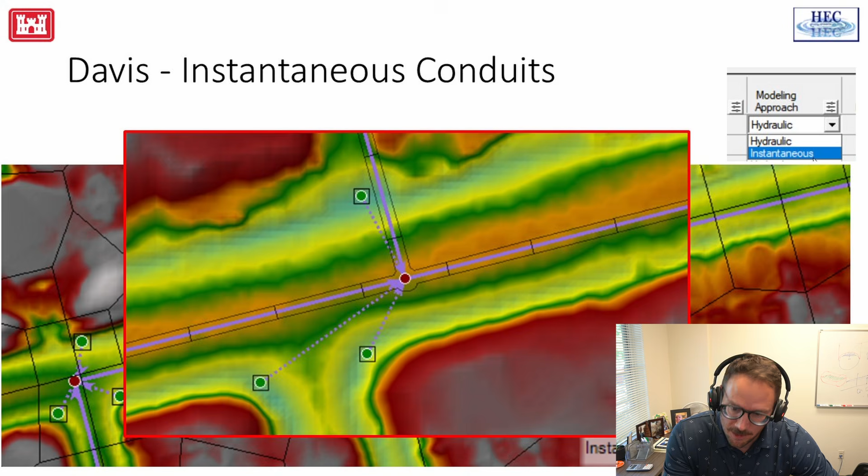Something that's sort of fun that we're doing here is we actually are computing the property tables for these conduits. But what we do is we lump them into the receiving node, so that node they're flowing into in the trunk line - those properties are lumped into that node. It really is the best representation of the pipe network system still, but we reduce the complexity by pulling those out of the computational mesh so you don't drive runtime with small cells. On the upper right, you can see how to do that - it's right in our conduit attribute table.

So the modeling approach, you get to choose between hydraulic or instantaneous. And for laterals, instantaneous is kind of the primary use case there.

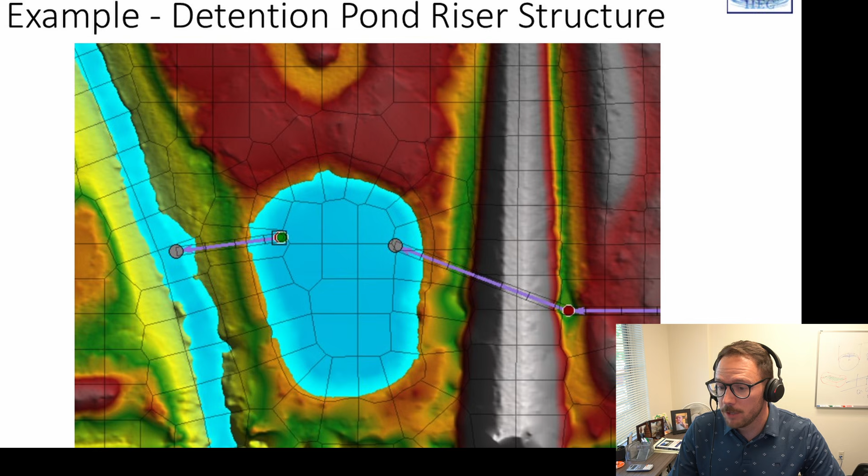Moving on to a different example. This is a very simple, small example we got from a user, and it's a detention pond. On the right, you have a pipe network that is flowing into this detention pond, draining a larger stormwater network into the pond. On the left, you'll see a little short conduit draining the detention pond into the channel. On the upstream end of that conduit is a riser structure, and we've modeled the riser structure in RAS.

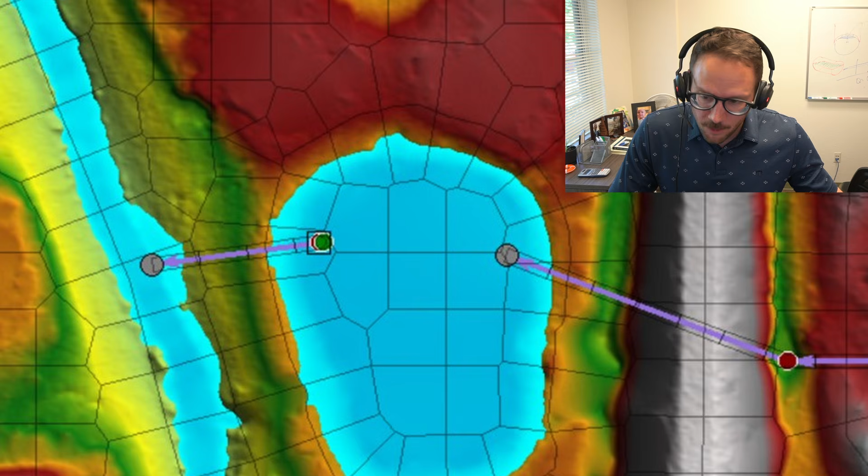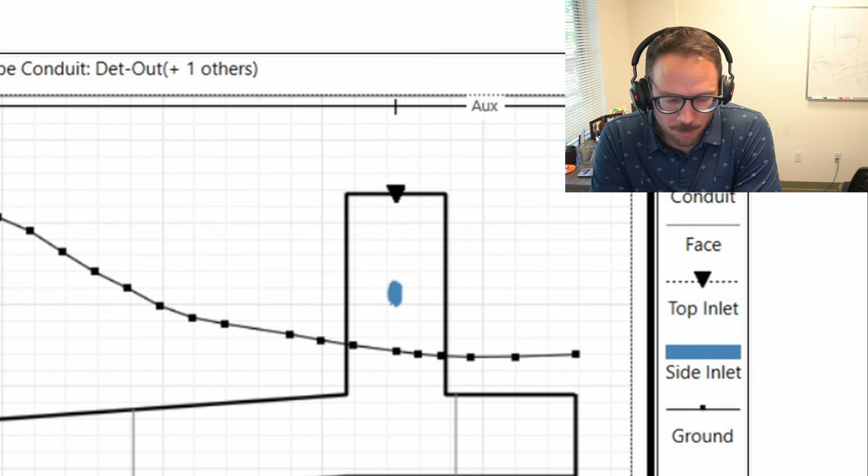I'm going to show you what that looks like. For this riser structure, on the node we attached both a top inlet and a side inlet. We're looking at the profile plot here. Top inlet is the triangle there - I've made them bigger so you can see them better, sitting at the very top of that node. And then you can also see the side inlet, which is the blue circle you have there.

So that's our restrictor. It's a little orifice that is designed to very slowly bleed the detention pond into the receiving creek, so as to not have a very large hydrograph kind of flashing into the creek.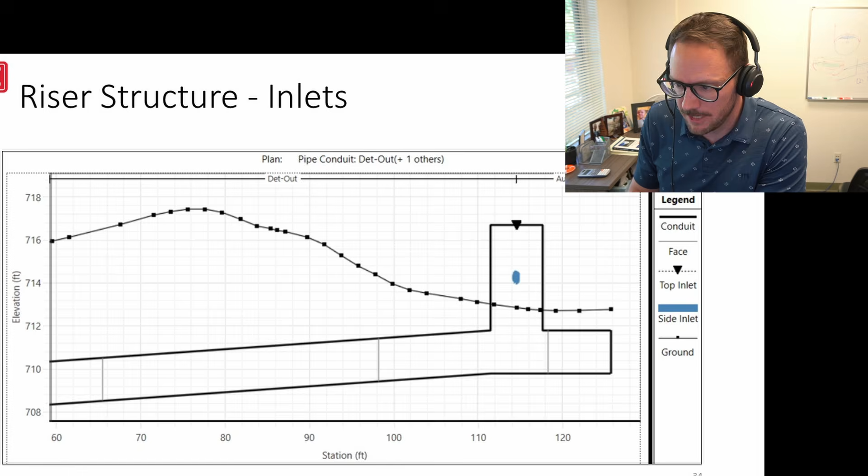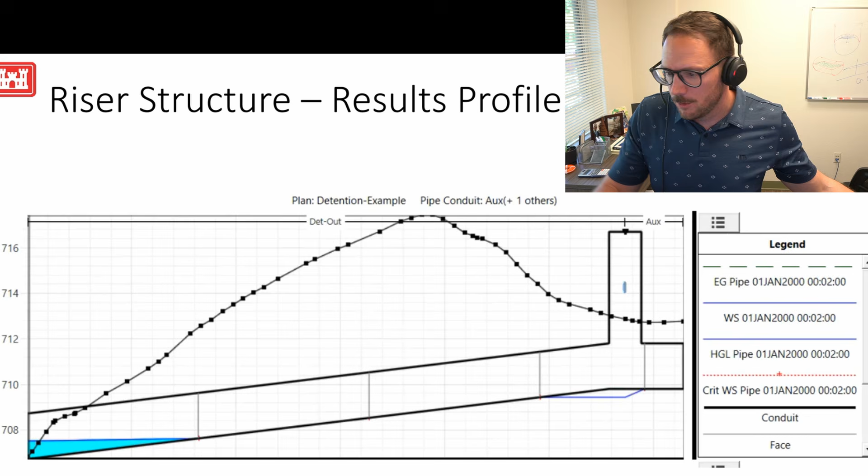So let's look at what the results look like from running this. First, profile mode, downstream end - you can see that the tailwater from the 2D creek is just a little bit above our invert for our conduit. And on the upstream end, you'll watch as the very large flashy hydrograph comes into the pond, how the pond level rises and then falls as flow is going through the drop inlets and the side inlets.

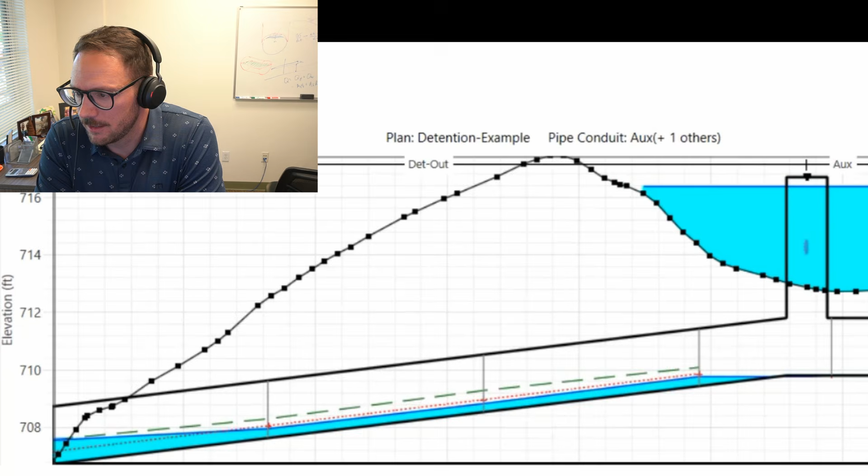Okay, there it goes. It very rapidly rises, and then the top inlet is that overflow, and it's quite large, so it can very quickly get water out of there. But then the side inlet is very slow draining - it's intended to drag out that hydrograph quite a bit, and you can see that there.

And so if we looked at the flow hydrographs and compared the two, I wanted to show you a side-by-side spatial view and the flow hydrographs. The green hydrograph is the inflow, and you can see it's very, very substantial inflow, a very peaky hydrograph. And the pink is the outflow.

So that's actually what the creek is receiving. We've done a really good job of chopping that peak off and dragging it out over a longer period of time. I'll hit the animation there - you can see the flow comes in very rapidly, stage rises in that pond. Then our riser structure is activated, and both the top inlet and the side inlet are flowing, which draws out that hydrograph for a long time.

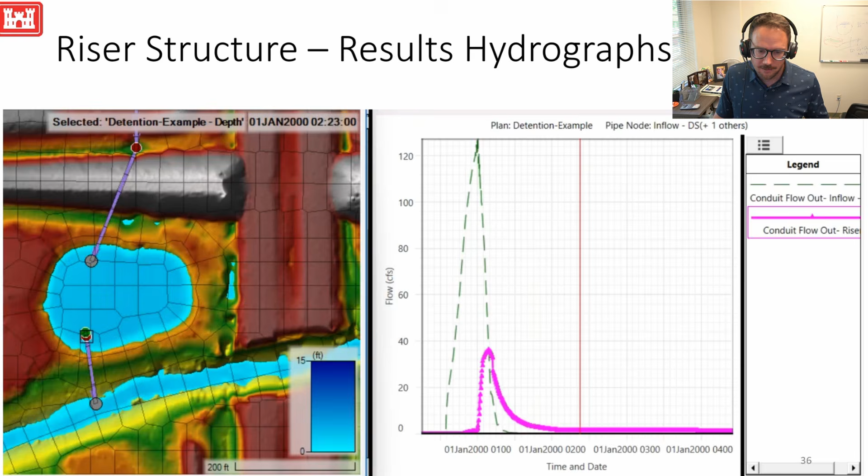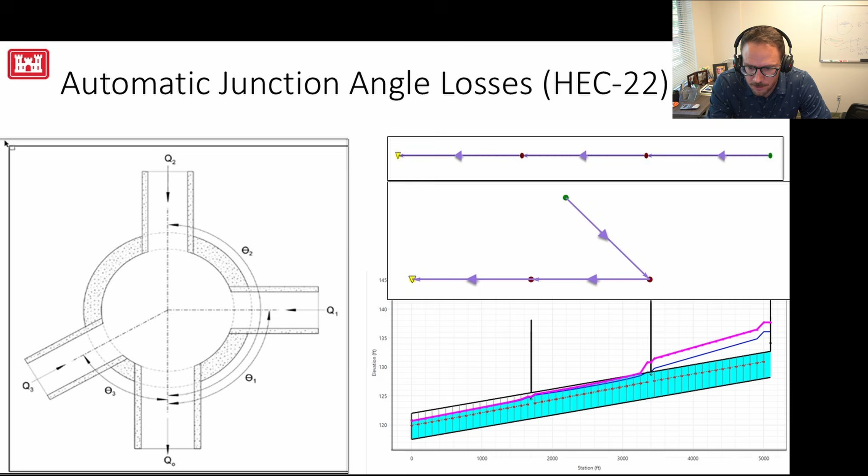Okay, finally I wanted to show you our junction loss calculations. Because we're geospatial, you can very easily look at the geometry of your pipe network and compute the losses due to angles at junctions automatically. We use the HEC-22 guidance - the Federal Highways guidance for stormwater. In HEC-22, they look at angles from the outflow conduit, that's the one on the bottom, and compute angles from it. Based on those angles and the flow, a loss is attributed to the conduits flowing in.

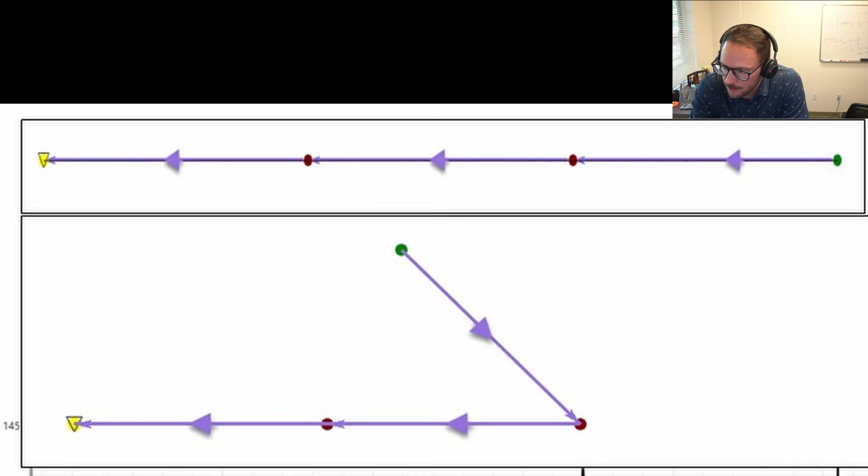That's the diagram on the left. On the right, you can see on top a straight run of pipe with a couple junctions in the middle. Below that, I've got that same run of pipe, except I've made a really tight 45-degree angle between the first pipe, the inflow pipe, and the second pipe - a very tight angle. Automatically, we'll go and compute that angle, and based on the flow going through that conduit, we can compute a loss. So what I'm showing on the profile plot is the difference between the straight pipe, the blue line for hydraulic grade, and the 45-degree angle in pink.

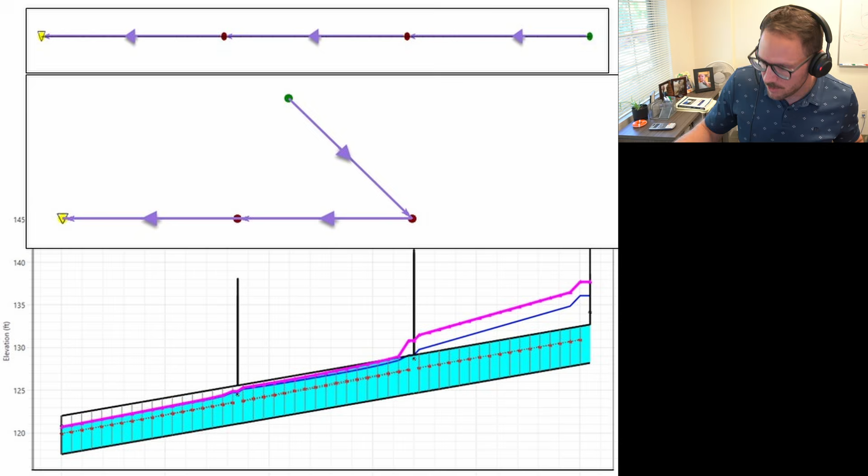So these losses can be pretty substantial. The modeling approach in other models is to try to look at what the junction looks like and then assign entrance and exit losses - it's kind of squishy, not a defined science. But because we're geospatial, we can just look at the geometry, know the angles, and go to HEC-22 to determine what loss is happening at junctions. It's really nice, and it'll have pretty substantial impacts if you have tight bends in your system.

Where do you find help? We spent a lot of time working on the user's manual. We realized these are brand new features, and particularly for RAS modelers used to surface modeling, we wanted to provide robust documentation to help you get started with pipes. The user's manual is really good to go through, and it's laid out in a stepwise way that you would walk through building a model. So I recommend looking at that.

The hydraulic reference manual is very detailed. It's going to tell you all about how we're calculating different boundary conditions at nodes, how we're calculating our hydraulic structures, that sort of thing. So if you're into that, you can find it in the hydraulic reference manual.

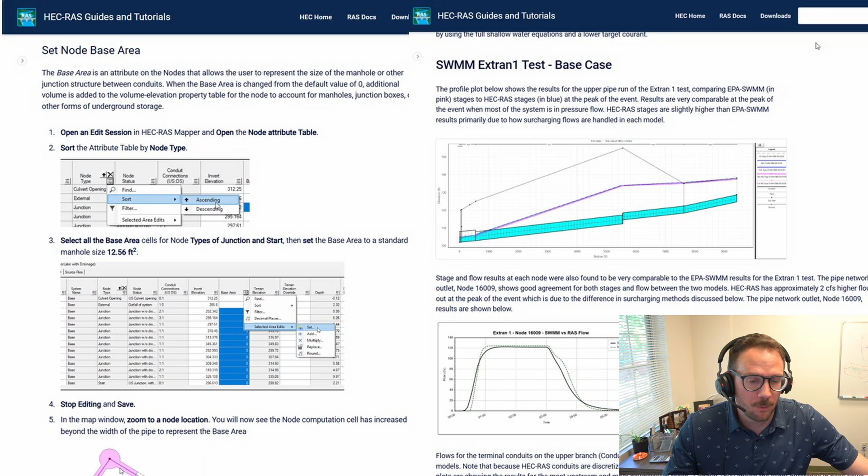In the guides and tutorials, we're actively adding more content, but we have complete tutorials from start to finish for importing a model from SWMM, attributing nodes and conduits, and then running simulations and looking at results. So that's a great place to start. If you've never done any pipe networks before, going to the guides and tutorials and walking through some of those will really get you started quick.

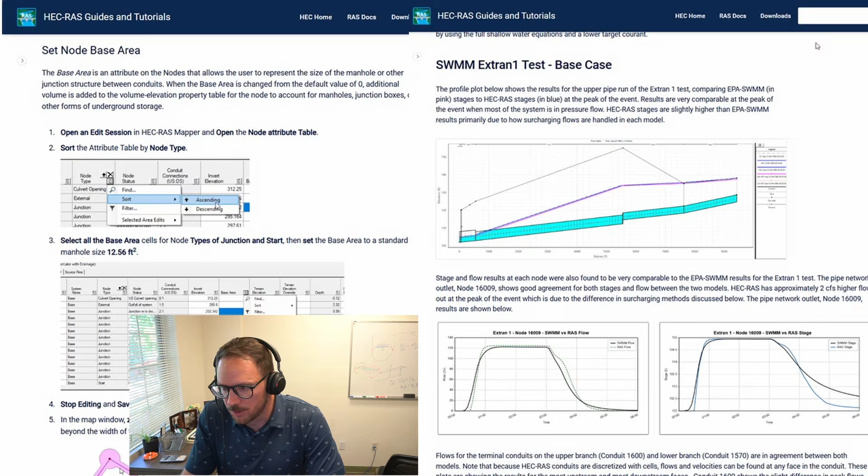We also have some sample data sets, and a couple of them we compare to SWMM data. SWMM has some validation data sets - Extran validation sets - and we import those models into RAS, compute them, and compare the results, discussing why the results are different and where the models are good. I encourage you to look at that as well. Those are both in the guides and tutorials section.